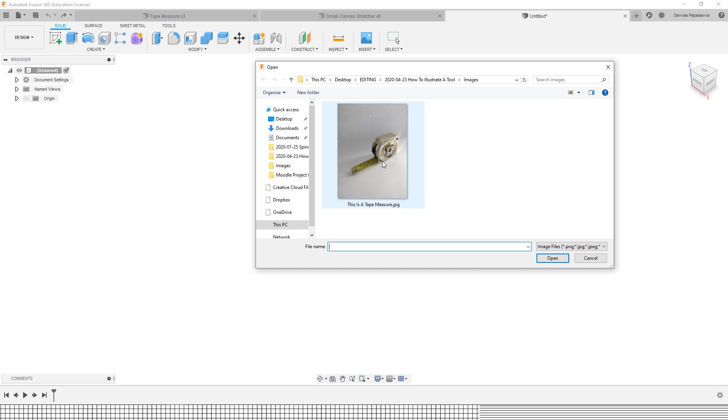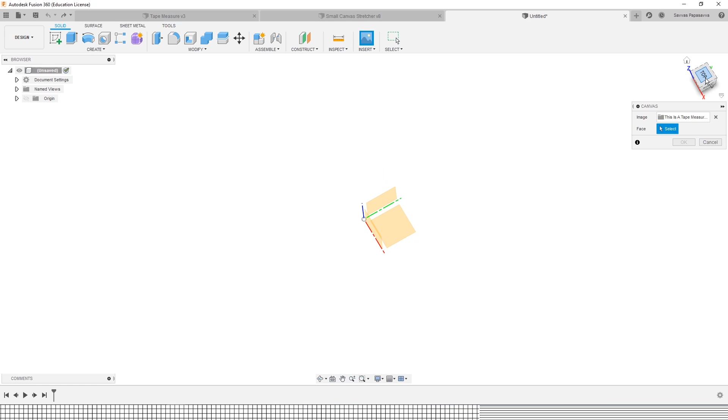What I'm going to do is import the image by clicking on the insert button here and pressing canvas and navigating to where it is in my computer. So this is a tape measure. I'll double click on that, and now it's going to prompt me to select a face where it will be positioned, and these planes here correspond with this block at the top right here, and I want to work from the top, so I'm going to click on this one here.

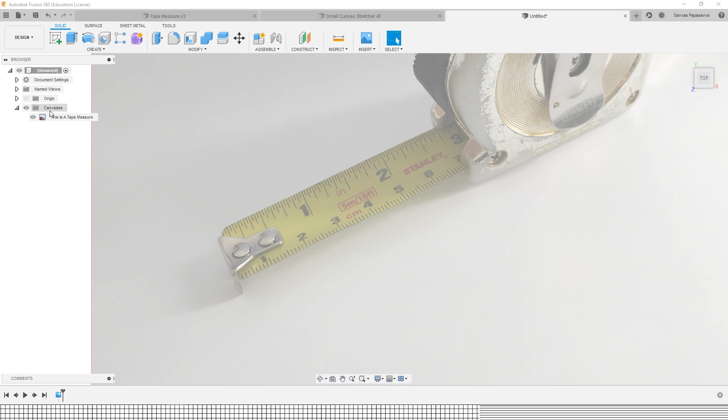You can adjust things here, including the opacity and the overall layout, but I'm going to keep it as it is. What I will do is scale this so that it corresponds with the actual object, and to do that I click on the canvases folder over here, right click on the image and press calibrate, and what this allows me to do is to click on 2 points and specify that distance.

At the moment it thinks it's 1.015989 millimeters. I know that's wrong. I'm going to change that to 10 millimeters, press enter, and now the image has scaled up so it reflects the object.

This is a nice feature if you're planning to produce an object which is based on drawings that you are trying to recreate as a 3D model, and I've done similar things in some of my other videos, but I can't remember which ones. I think maybe the coping saw video I might have used this technique. But in any case, if I remember, I'll add a link somewhere.

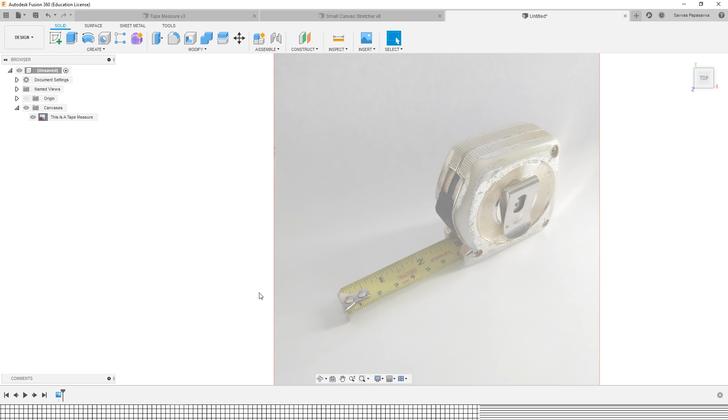Now what I can do here is create a sketch, and I do that by pressing the create sketch button up here, and again selecting the plane that I want to work on. So it's going to be the XY plane there. I can zoom in and start to draw vector lines.

I particularly like using this software because I find the tools at the top up here a lot more intuitive to use than say Illustrator, and you also have other features such as the rectangular pattern tool, circular pattern and mirroring features which really expand the possibilities of how you can create your vector illustrations. But for this instance I'm mainly going to use the line tool and the spline tool.

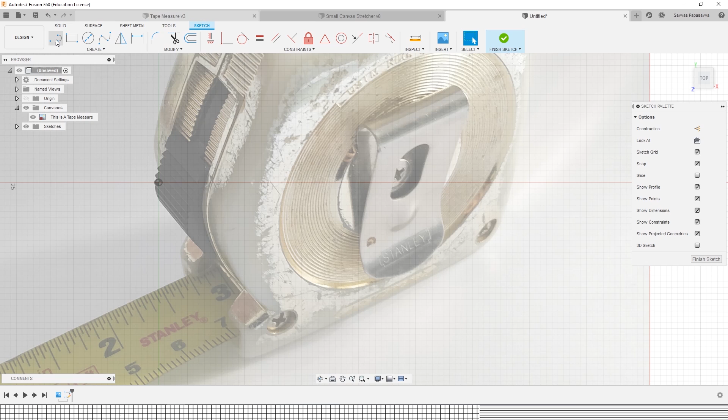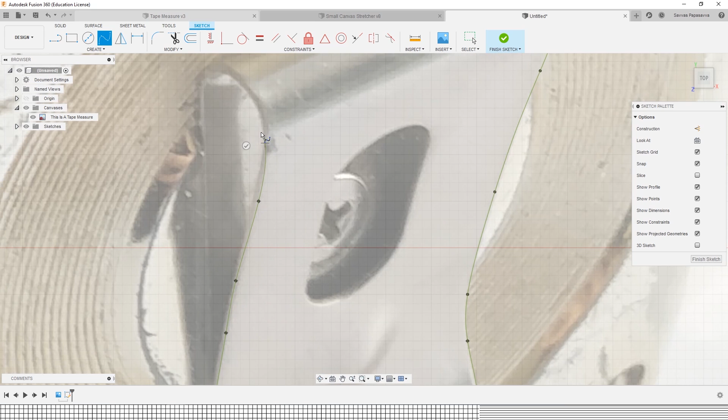If I start with the spline, I can zoom into the belt clip here and I can start to draw around this shape and just move the screen around slowly, and I don't have to be too perfect because I can come back to this later and edit the individual nodes and move them around a little bit.

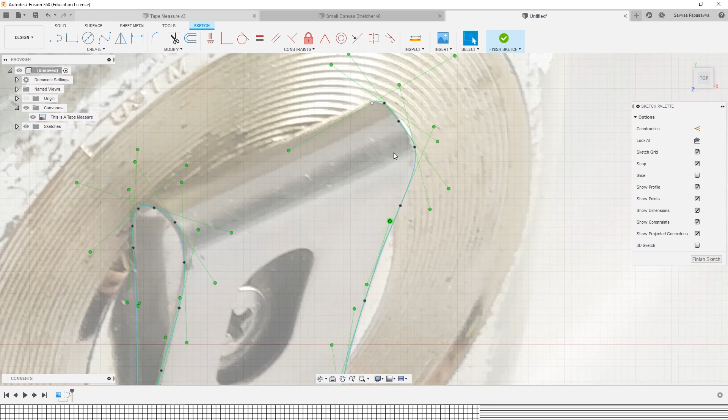The trick with this is the further apart the nodes, the less detail in the vector, and if you put the nodes closer together you can get slightly tighter curves. When I'm done I press enter and then that applies it. Here you can see some of the nodes that you can edit, and you also have these green lines which are the arcs.

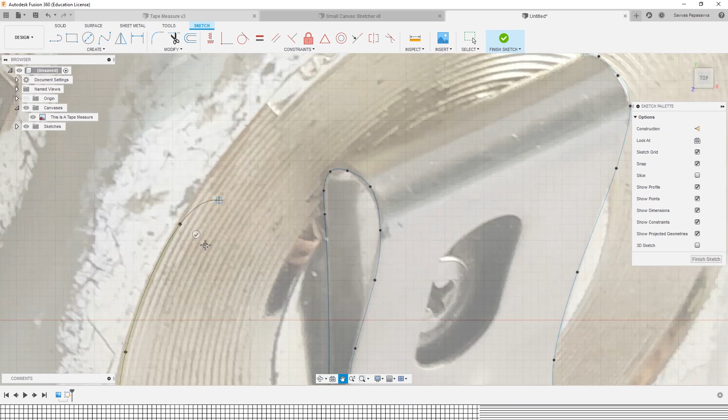So this doesn't have to be too perfect. I think the trick is to get it looking as convincing as possible. If accuracy is your goal, because you're planning to actually make this thing, you would probably want to use the 3D modeling features in the software, but that's not my aim today. I'm just trying to create the effect of the tape measure as an illustration.

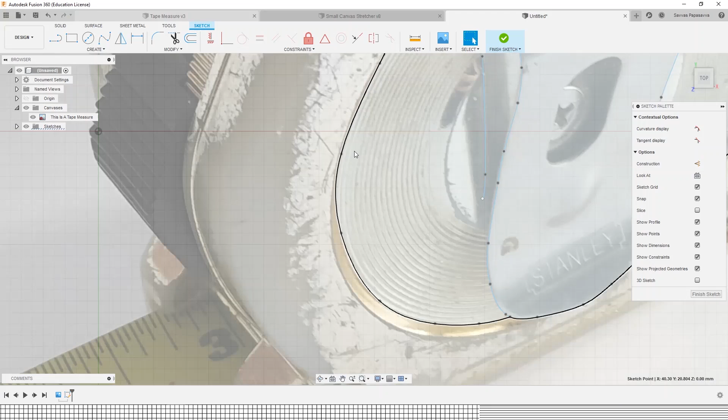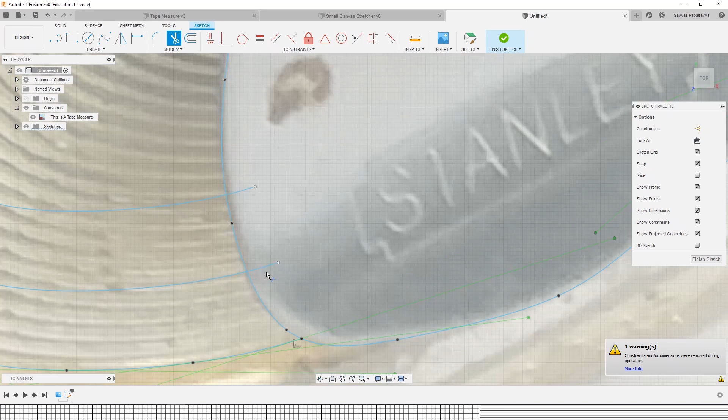So there are some interesting features as I've mentioned before. Another one is the offset tool, so I can offset the lines so I don't have to repeat the spline process and give myself RSI. Once I've done that, I can locate where the vectors have overlapped and I can trim them down, and essentially I can work my way around the entire object until I've got enough detail. While I'm doing that, I can make the canvas invisible and just look at the vector lines themselves.

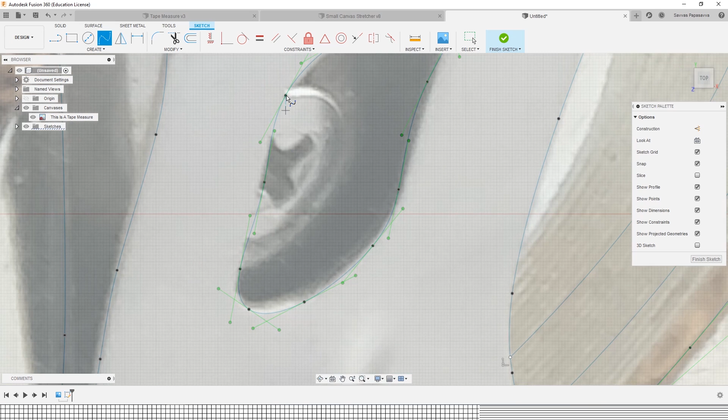So this is a really nice feature if you want to reverse engineer something, or in this case just simply create vector lines to use for an illustration. This process I've kind of used to create my CNC manual, and I'll show you some of those later. Anyway, that's how you import a photograph into Fusion and then create vector illustrations on top of it.

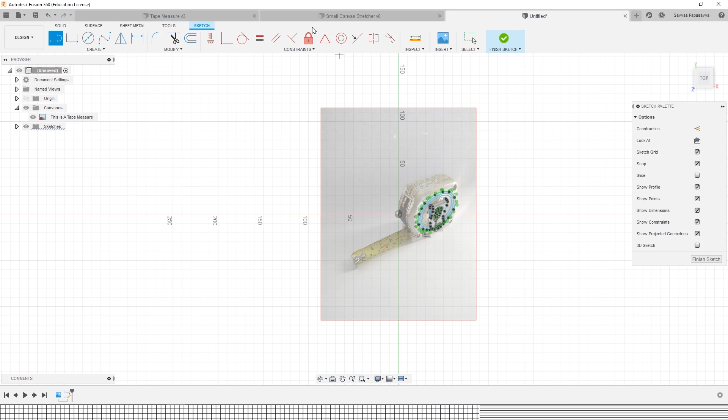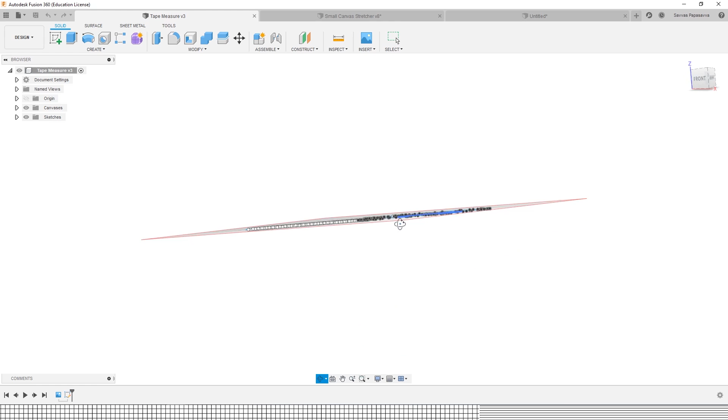So if I go back to my original image, this is one I did earlier, and you can see all the vectors on top of that. What I can do now is export this, and the way you do that is to click on your sketch, so right click, save DXF. This is a tape measure, but it's not a JPEG.

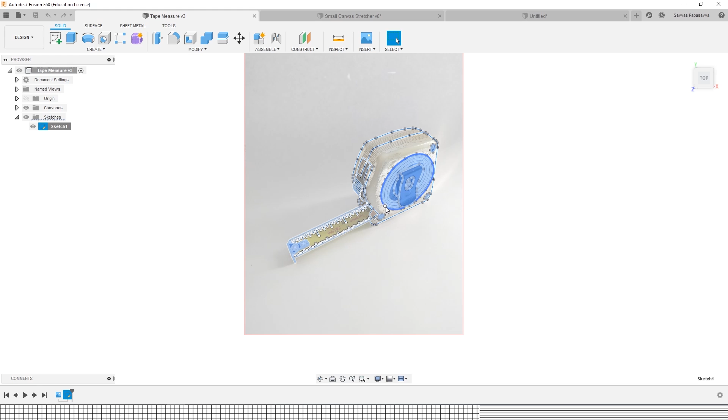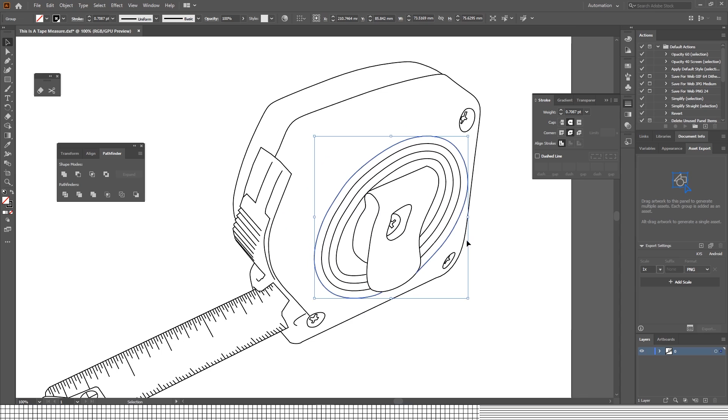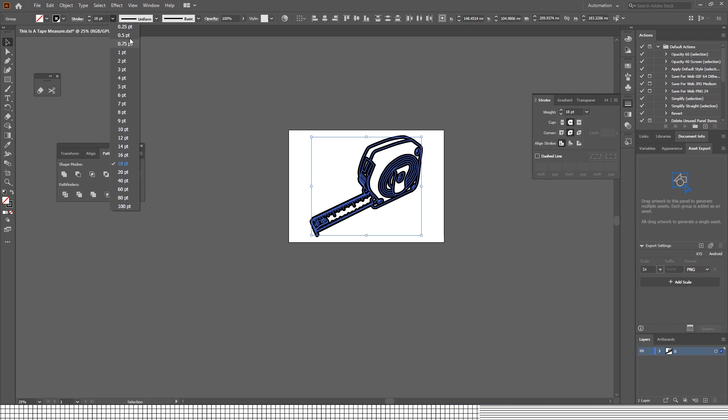The first thing I normally do is just check that the thing isn't all grouped together. If that is the case, I would normally click on the individual image on the layer section down here, and I would play around with the flatten artwork and merge selected to open that up. I can now change the line weight. I could go a bit crazy and make it super thick so there's no detail. I normally stick with 0.5 or 0.75.

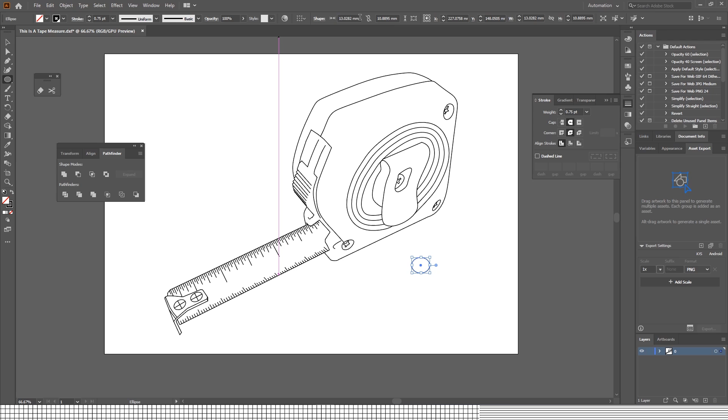What I normally do after I've got the image is do some diagrammatical overlays, which will then correspond to things like tables or other bodies of text. The way I normally do that is by creating a circle, which I can specify the size. So if we say 10 mil up here, and then I can swap over to the line. I can ding that off over there. I can also make a text, number or letter, and I can resize that to whatever looks visible.

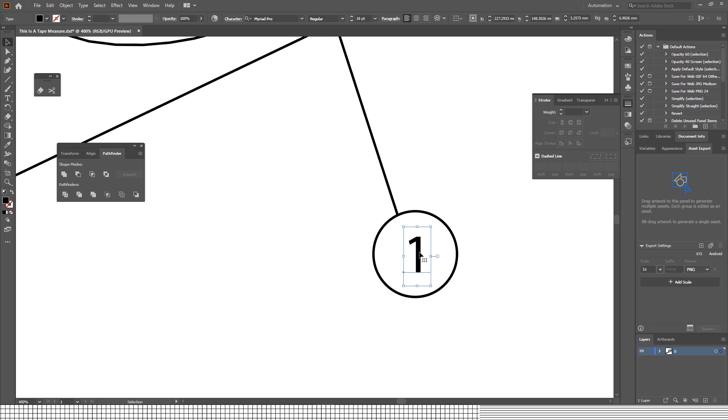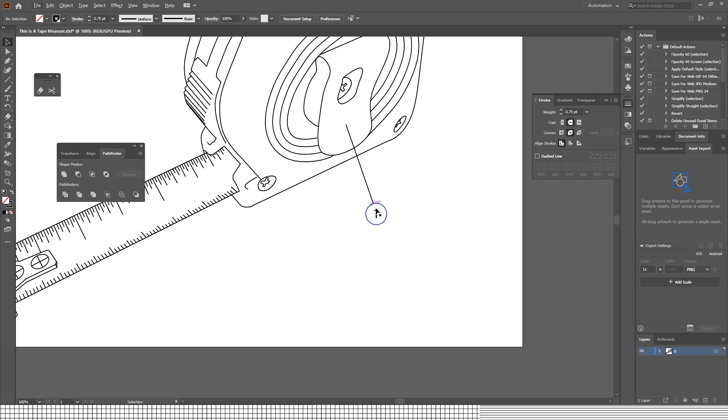And then to center that, what you do is you click on the object which is inside the vector you want to align it to, press shift and click on the outer vector, and then let go of shift and click on the outer vector again, and that becomes kind of solid blue, as you can see there. And now I can use these buttons up here to adjust where it is positioned, so it can be on one side or the other, but in most cases put it in the center. And then it's just a matter of copying and pasting to populate around the object where necessary.

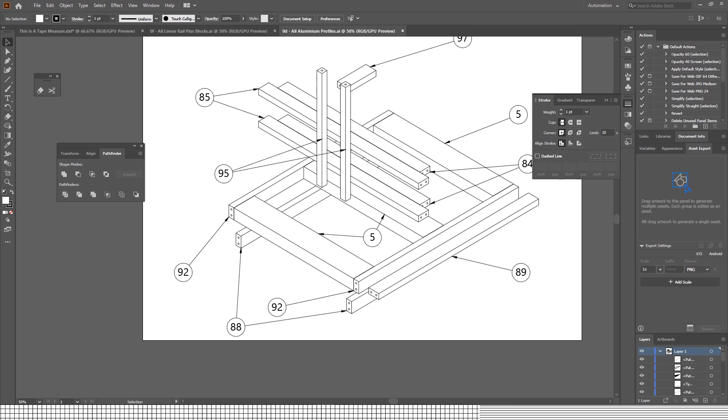But either way, you can use Fusion 360 to either import images to then create illustrations on top of, or 3D model the thing if it's possible, and then create images that you can use to then illustrate a method or process. And because we're all on lockdown at the moment, this is quite an effective way of conveying ideas and still being able to teach despite not necessarily having access to the real things.